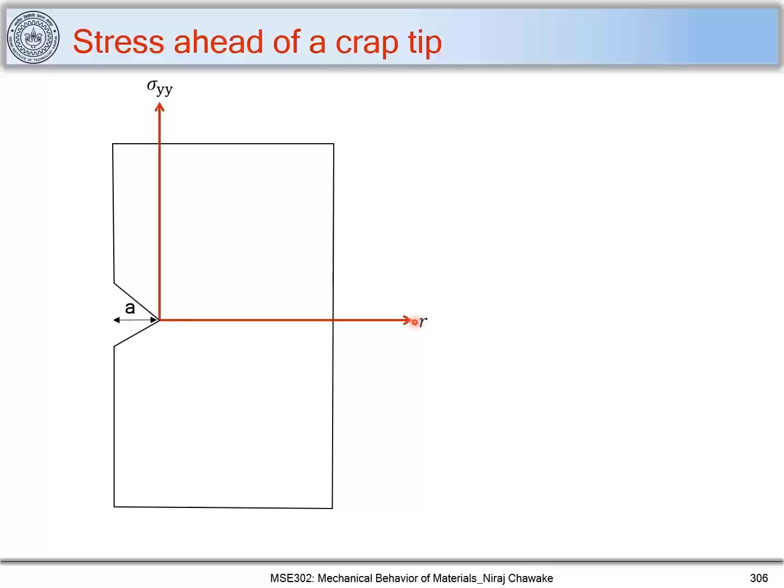In this part, we'll be looking at how cracks which have plastic zones ahead of the crack tip are modeled. For that, let's consider this sample which has a surface crack of length A, and let's mark coordinate axis R here ahead of the crack tip, and sigma yy, that is stress along the yy direction.

Let's say if we don't have a plastic zone ahead of the crack tip, or the material is elastic or a very brittle material, you will see the stress field ahead of the crack tip varying in this fashion, where you reach a very high value of stress just ahead of the crack tip. We have seen this in an earlier part.

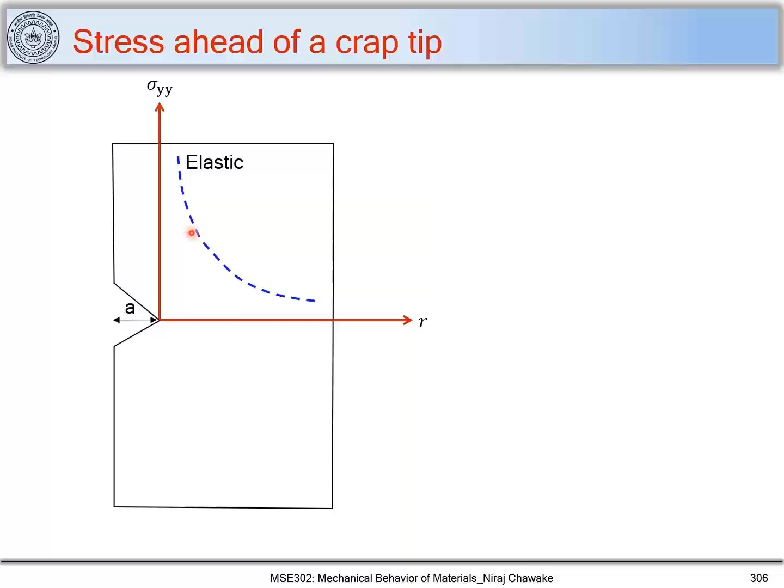Now let's consider we have a plastic zone which has a diameter of Rp ahead of this crack tip. This will happen when the material deforms plastically, or the material is plastic or ductile.

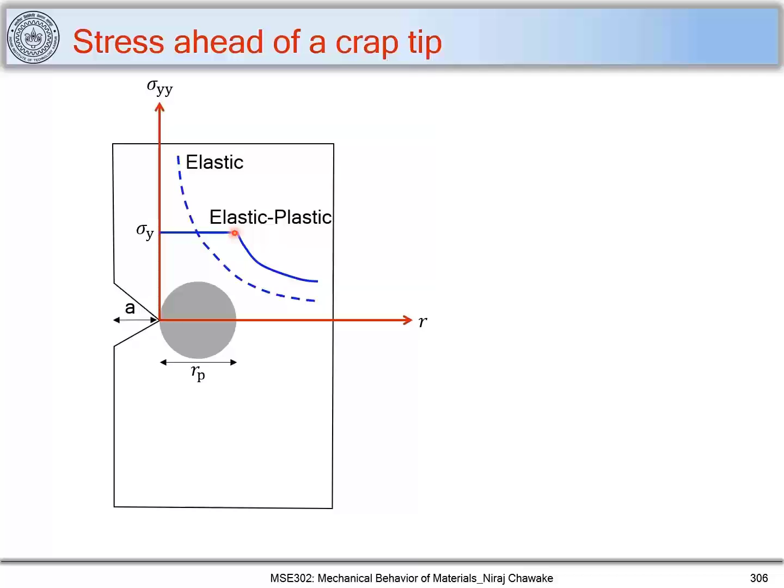So we can see that for this kind of material which shows a plastic zone ahead of the crack tip, the stress variation will be sigma y, where sigma y is nothing but the yield strength of the material. So the stress ahead of the crack tip remains constant, and such materials are called elastic plastic materials. When this plastic zone ends, the stress varies or decreases in this fashion with respect to R.

Irwin has described this kind of elastic plastic material using a model, and he considered this radius to be A effective, where A effective is nothing but this crack length A plus Rp, which is the diameter of this plastic zone. This Rp can be found out using this radius R1, and Rp is almost equivalent to twice of R1.

If you consider this material to be elastic, you have the stress field variation with respect to R in this way, and when you have an elastic plastic material, you have the stress field variation in this way. Where these points intersect, that R is nothing but your R1.

So here R1 is the location where this elastic stress becomes equal to sigma ys, that is the yield strength of the material. That is how you find R1, and from R1 you can find the plastic zone, which is nothing but equal to twice of R1.

Irwin considers that A effective, that is the effective crack length, to be equal to A plus Rp. This is nothing but a fictional crack length. If you consider this theory, this model considers a longer crack length, but it takes care of the stress field. So you can see the stress field will be taken care of if I consider this crack to be of this length, that is A effective, it can take care of the stress field ahead of this plastic zone.

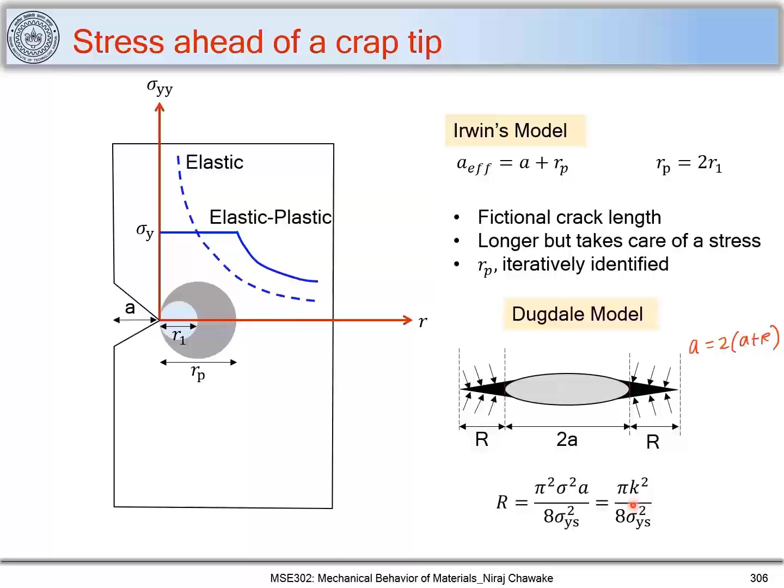What Dugdale considered is that this plastic zone blunts the crack, and it can be considered that there are compressive stresses acting on this region of R, which is the plastic zone. So we have an effective crack length of 2A plus R, and on this R part you have compressive stresses. Based on this assumption, R can be found out to be equal to pi K squared upon 8 sigma ys squared, where sigma ys is the yield strength of the material.

And you can find out the length of this plastic zone using Dugdale's model. I'm not going into the derivation of it; it's given in the Mechanical Metallurgy book by George E. Dieter.

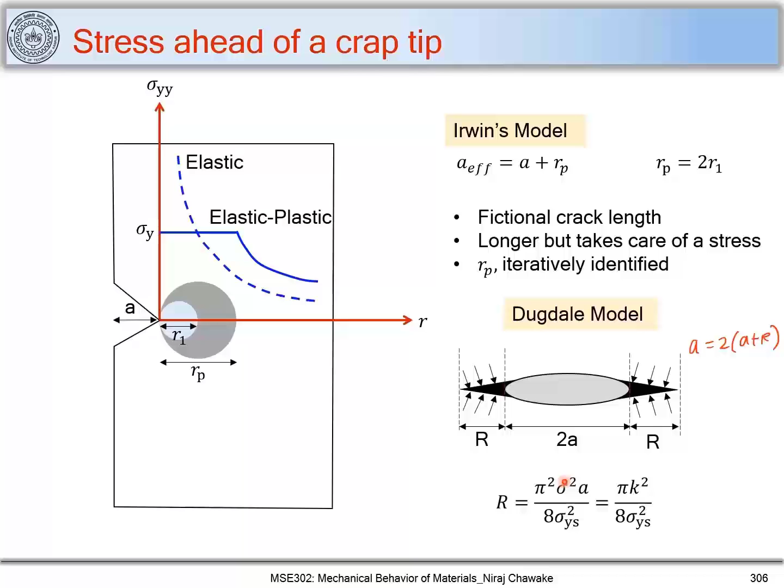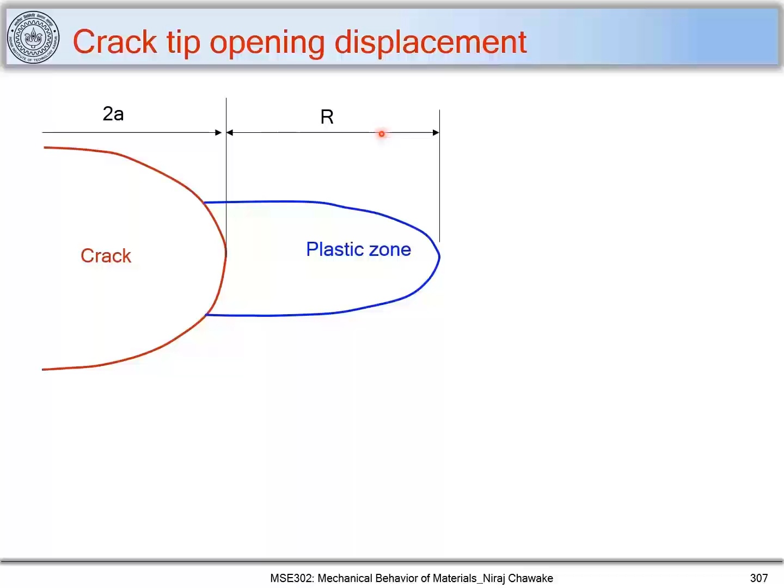Now let me introduce an important term when we talk about elastic plastic materials, that is crack tip opening displacement. So for that, let's consider this as a crack, and let's consider a plastic zone ahead of this crack tip. Let's consider this crack of length 2A and the plastic zone of length R. Let's consider this crack is subjected to mode 1 fracture, and let's mark our coordinate axes, x along this direction and y in the vertical direction.

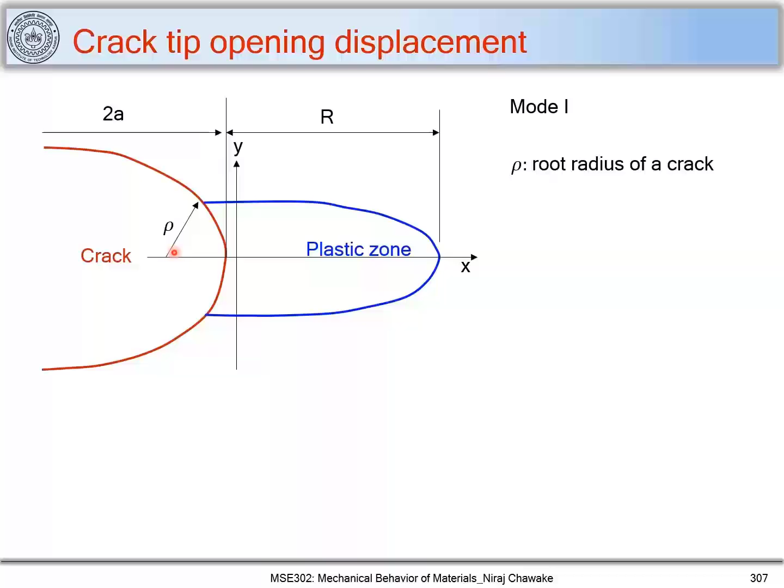Let's consider this to be the root radius of a crack, that is rho, and this distance delta is called crack opening displacement. So when you subject this crack under mode 1 condition, this delta will increase. Let me mark that. So when you put a force in mode 1, you can see that this delta tends to increase, and this is why it is called crack opening displacement, because this crack will open.

Now this delta, small delta, is called crack tip opening displacement. So you have this crack tip, and when I put this crack in mode 1 fracture, you can see that this delta also will increase, and this is called crack tip opening displacement.

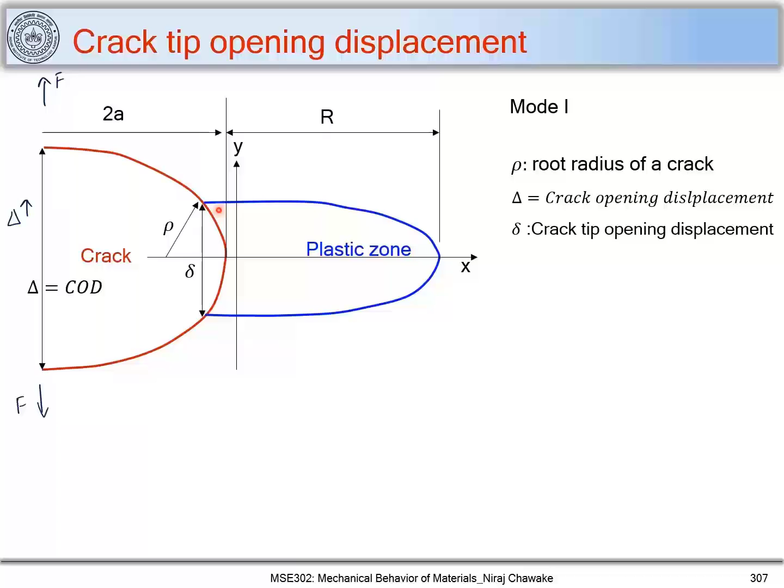Now what you can consider is that this is a plastic zone. So ahead of this crack tip, you can consider that there is a tensile sample or specimen which has dimensions of length L and width W. So you can say that when the force is applied, this tensile sample will experience some kind of plastic strain, because it lies in the plastic zone, and that's why this sample will elongate, and that is how this delta is modeled based on the strain developed in this tensile sample.

So this is an imaginary situation or just a thought experiment, that there are a series of these tensile samples ahead of the crack tip which can represent this plastic zone. Now, when this sample breaks, it passes the strain on to the next sample like this. So here you can consider another sample, and when this sample breaks and causes a fracture in the next sample...

In such a case we call this crack to be unstable. When this sample fractures but doesn't cause any fracture in the second sample, such a case is called stable crack growth. So let me write that down. So you have these samples. When sample 1 causes fracture in sample 2, this is called unstable crack growth. When sample 1 fractures but doesn't cause any fracture in sample 2, this is called stable crack growth.

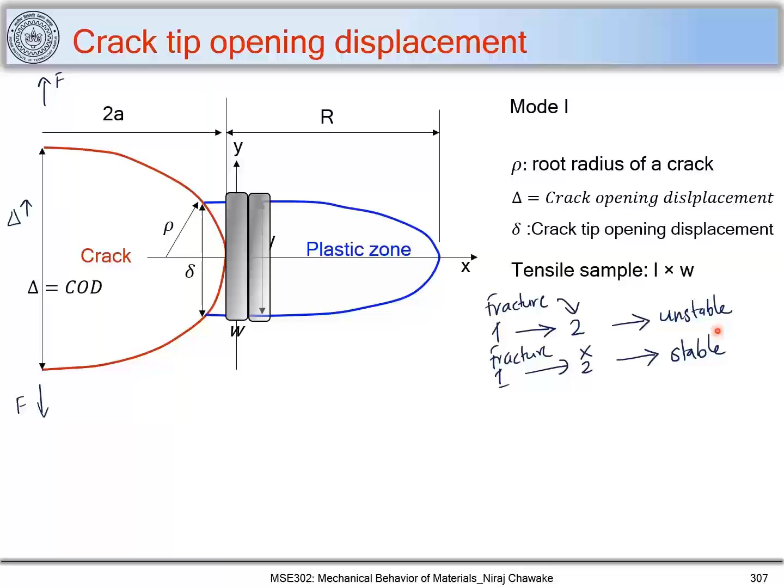So we can find this out using crack tip opening displacement, and an important relation we can find when this crack propagates in a stable way is the strain energy release rate, that G is equal to sigma ys, which is nothing but the yield strength, times delta, which is nothing but the crack tip opening displacement. So you can refer George Dieter for finding out how this relation comes.

You can use Dugdale models, which we have figured out, to find what R can be in terms of sigma ys, and based on these relations you can find out what the strain energy release rate can be. This is an important relation where G is equal to sigma ys, the yield strength of a material, times delta, the crack tip opening displacement.

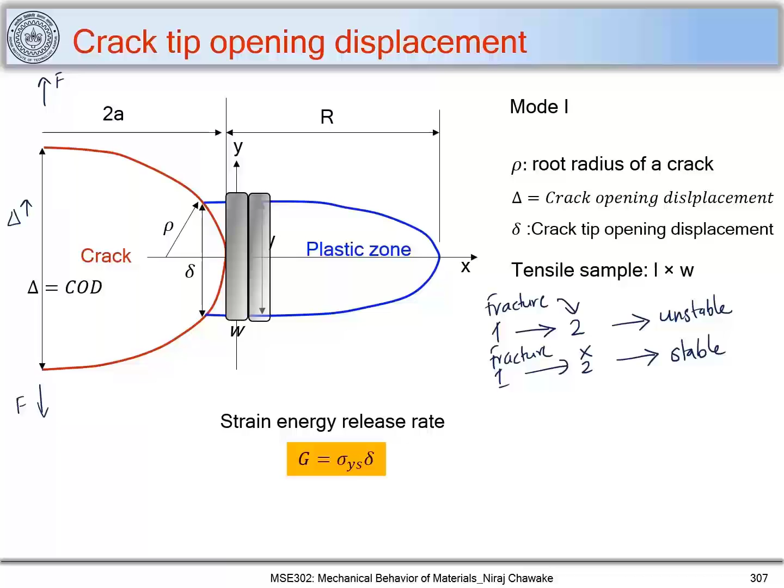Now let me move on and introduce two types of fracture mechanics when we try to understand fracture in materials. One is linear elastic fracture mechanics, another is elastic plastic fracture mechanics. Linear elastic fracture mechanics works very well with brittle materials we have already looked at, and materials which have very high strength, like more than 1400 MPa. For such materials you can comfortably use linear elastic fracture mechanics. However, when the material deforms plastically or materials are ductile, you should use elastic plastic fracture mechanics to understand the fracture behavior of such materials.

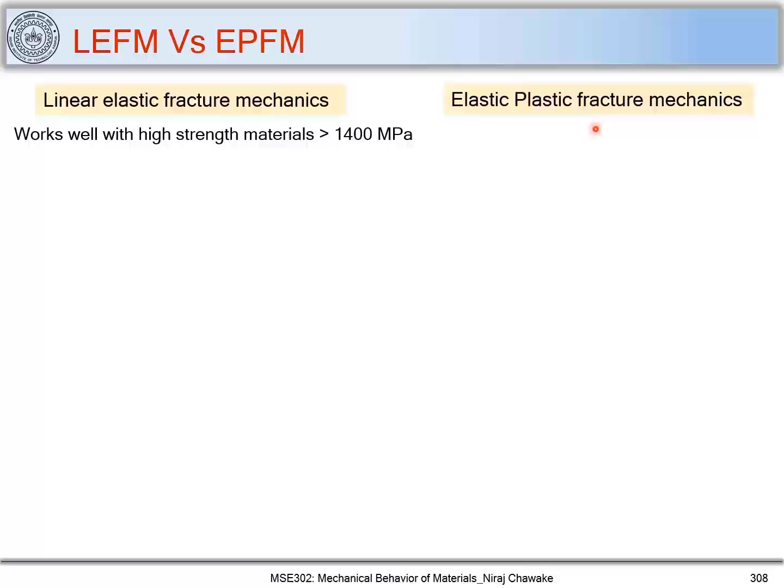Now let me explain to you what LEFM is. So let's consider you have force and displacement of this crack.

Let's say you have a sample of thickness B equal to 1, with an initial crack of length A. In such cases, the crack will displace when you apply or increase a force linearly. That is why it is called linear elastic fracture mechanics, since the displacement has a linear relationship with the force.

Now let's say you have a crack A plus delta A, a small increment in crack length. We have seen that the force to extend such slightly bigger cracks will require a less amount of force. The energy we get here in between, we term it as G into dA. The difference between these two gives you the quantity GdA, where dA is a small increment in the crack, and G is the strain energy release rate.

Now when we look at elastic plastic fracture mechanics, we also plot force versus displacement. But in this case, the variation of force with displacement is not linear. Consider the unit thickness of the sample to be 1, and for a crack length A, the force displacement relation is not linear.

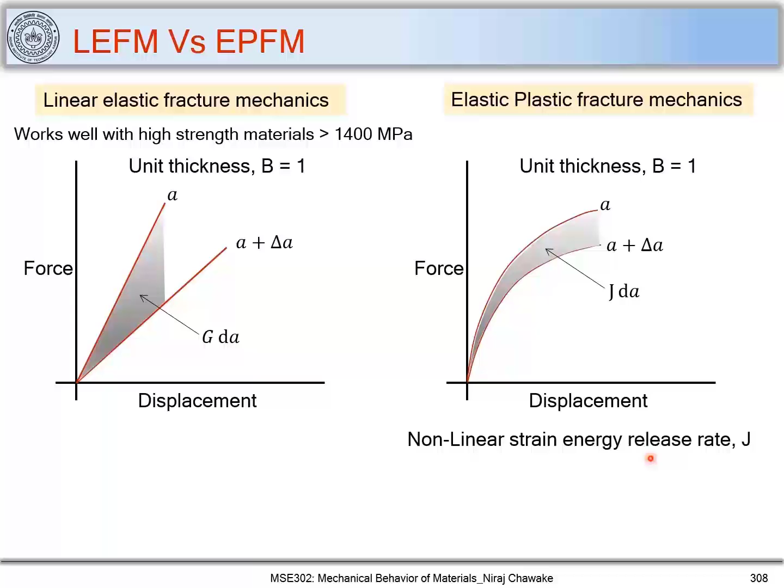So the linear strain energy release rate we denote by G, whereas the non-linear strain energy release rate we denote by J. This J comes from the name James, the first name of James Robert Rice, one of the famous scientists from Harvard University, who proposed how to identify this energy when you have a non-linear variation of force with displacement, that is, elastic plastic fracture mechanics. He contributed the concept of the J integral. So J comes from James Rice, and G comes from the name Griffith.

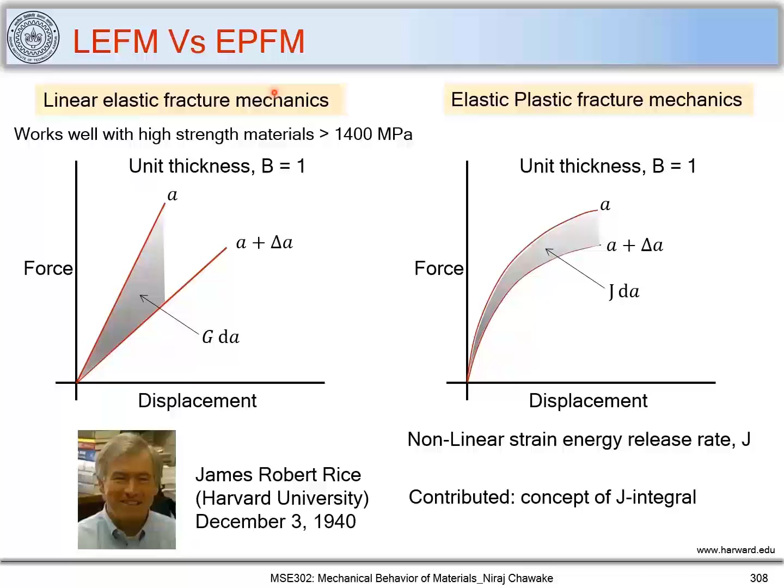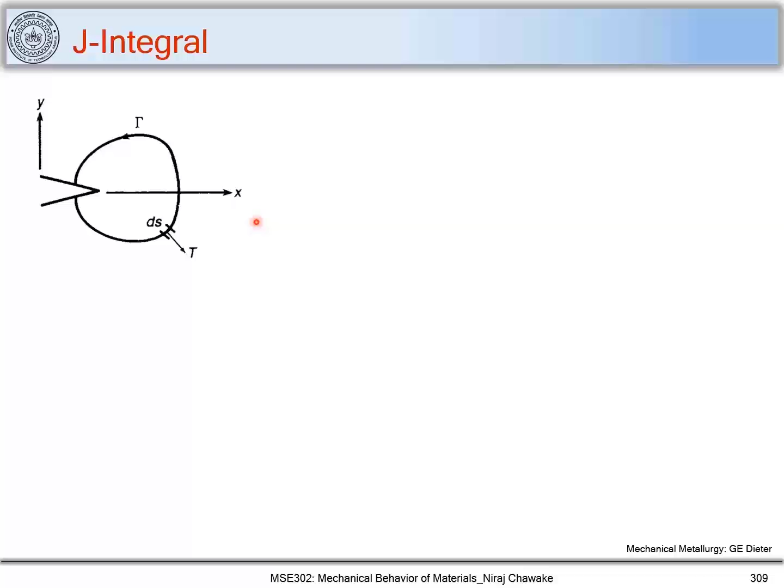With this introduction, let's understand what the J integral is. We have to find out what the non-linear strain energy release is. Let's consider this crack, with this as the X direction and this as the Y direction. These are our coordinates, and let's consider this line given by gamma, capital Gamma.

To find J integral, the non-linear strain energy release rate, we do it by finding a path independent line integral. We consider this as the path, marked in this way, enclosing the crack with this line. That is why this is a line integral to find J, which is the non-linear strain energy release rate.

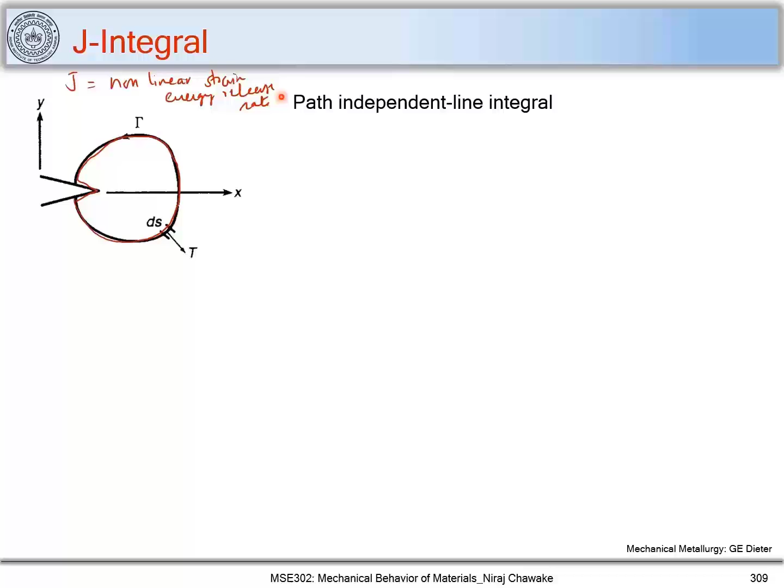Now we'll follow the same methodology used to find G, the linear strain energy release rate. Let's consider this a 2D approach, with thickness equal to 1. We find J to be equal to minus du naught upon dA, where when the crack extends there will be a release in strain energy, which we call the release of potential energy per unit crack extension. This can be found using this line integral over the line segment gamma.

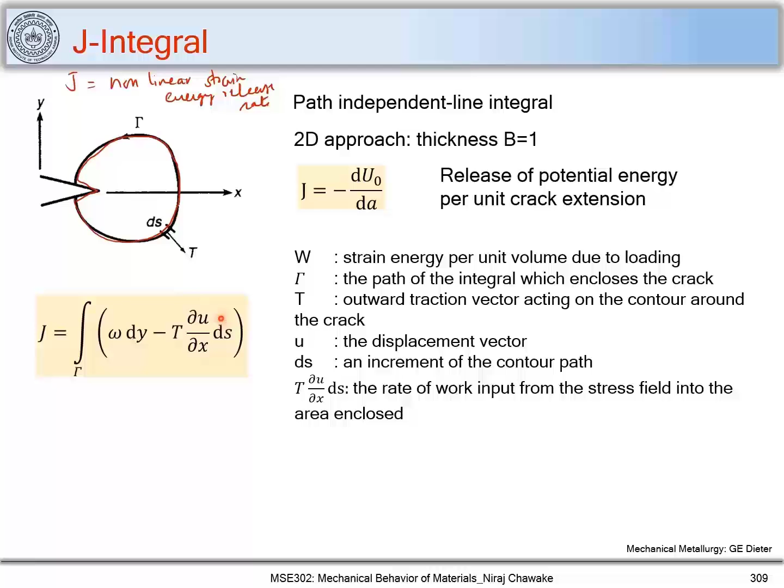When the crack extends, there is a release of strain energy. Also, some work must be done, given by this term. This total value gives us the change or release of potential energy per unit crack extension. This term gives the strain energy per unit volume due to loading. This gamma, the path, must enclose the crack.

So this is the path of the integral which encloses the crack. This T is nothing but a traction vector, that is a force acting on this crack on this path, small path ds, which is nothing but an increment of the contour path. So when we consider this small path and integrate over the whole path gamma, this T del U upon del X into ds gives us the rate of work input from the stress field into the area enclosed.

When this crack extends, there will be a release of strain energy, and there will be work done to form a new surface, or an increase in energy to form new surfaces. This can be amounted by considering the rate of work input from the stress field into the area enclosed. So what is the energy required or work input when the crack extends?

And when I say it has to be path independent, what do I mean by that? So I can consider any path - let me mark that also. So I can consider this as my path; the only criteria is that it should enclose this crack. I can move around like this and still enclose this path. I can consider another path, something like this, with the dimensions of the sample itself. So you can consider this path as well.

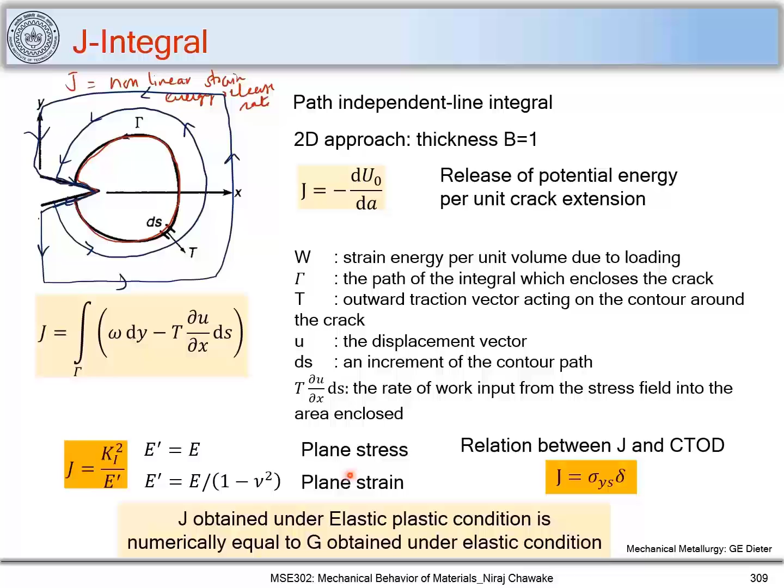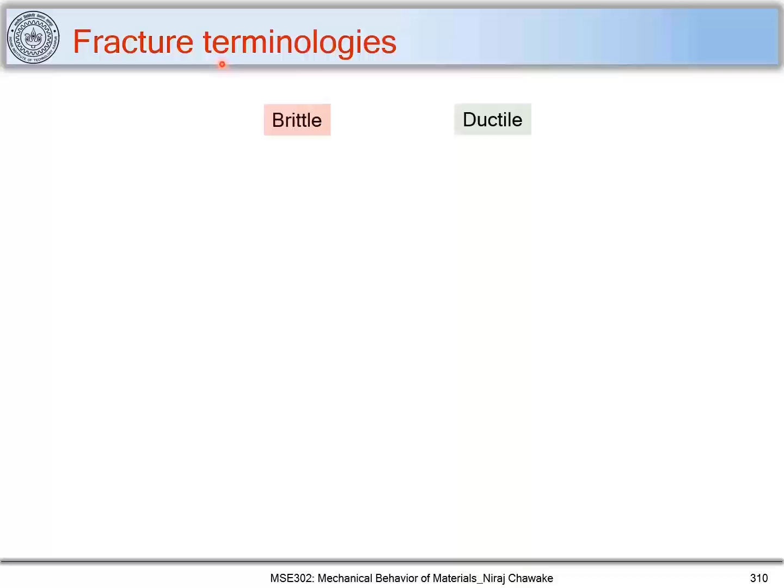And based on this, we can identify what the J value can be at different conditions of stress, that is plane stress and plane strain conditions. Now let me give some terminologies used in the literature, when we consider brittle fracture and ductile fracture. There are three ways based on which fracture terminologies are used. Let's say, crystallographic mode.

So when I talk about crystallographic mode, I call brittle fracture as cleavage fracture. When I talk about cleavage, I mean I'm talking about certain crystallographic directions or planes. And thus, if I call such kind of fracture as cleavage, that means it is a brittle fracture. If I call it shear, it is a ductile fracture.

Now, based on appearance of fracture, you call it granular or bright. So when the material shows, let's say you see a fracture surface and it appears granular or bright, you can consider that the material has failed in a brittle way. And if it is fibrous or dull, you can call it a ductile fracture. Now, based on path, you can call intergranular fracture as brittle fracture, and transgranular fracture or intragranular fracture occurs in ductile materials.

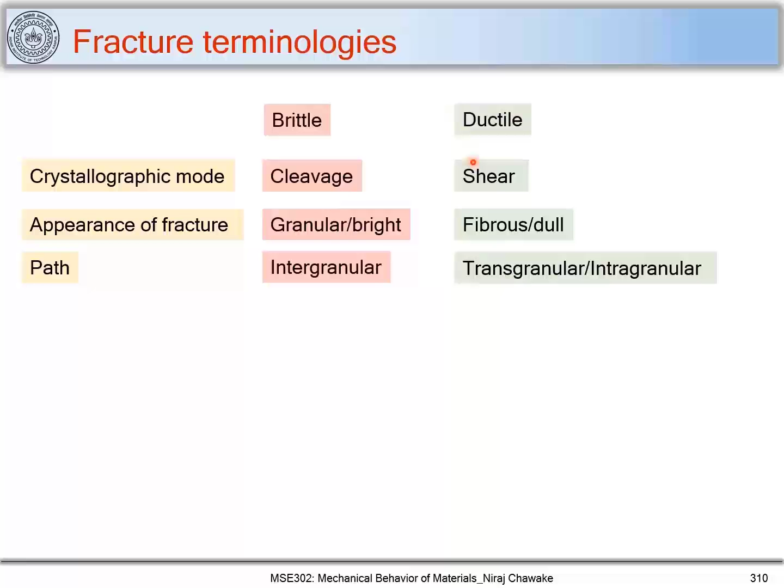So let's understand this: when I say cleavage, I'm talking about a crystallographic mode, and here when I talk about cleavage, it's a brittle fracture.

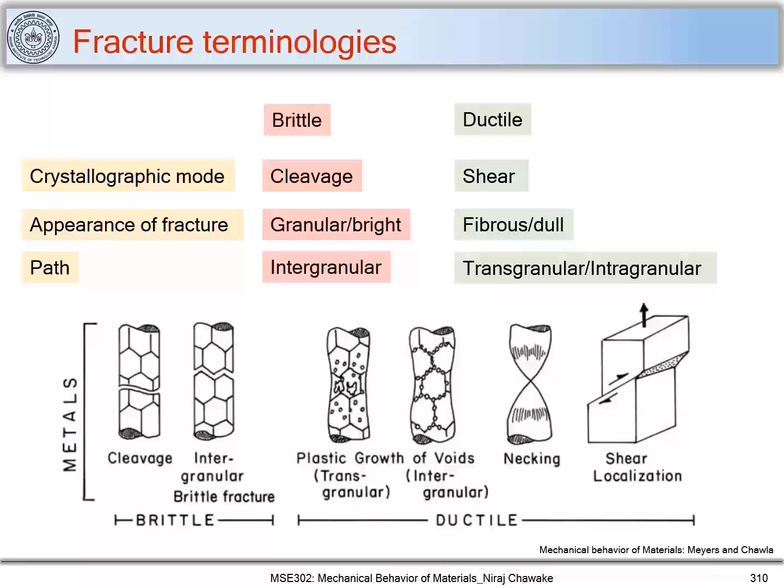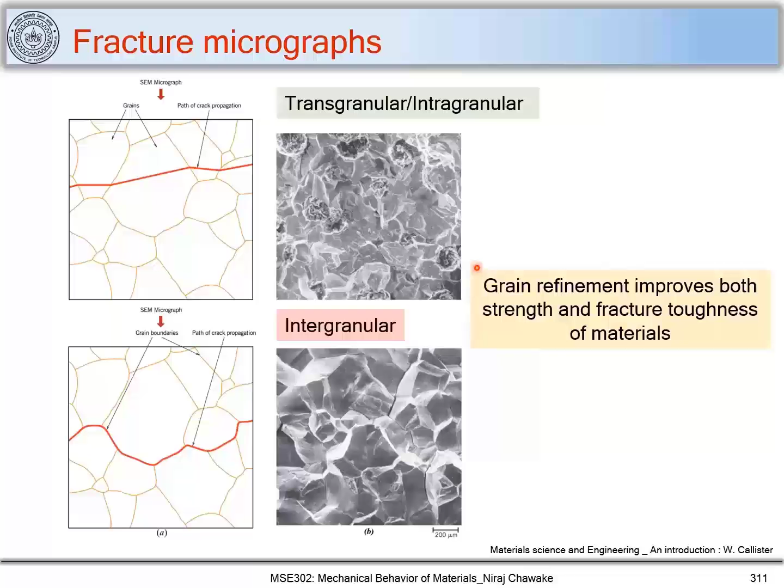In this case, you can say that grain refinement improves both strength and fracture toughness of material. So as you can see, if I have finer grains, the crack will take a longer path along grain boundaries, and thus grain refinement improves fracture toughness. We have also seen that grain refinement improves the strength of material. Now let's go on and try to understand how we can design a material to resist fracture.

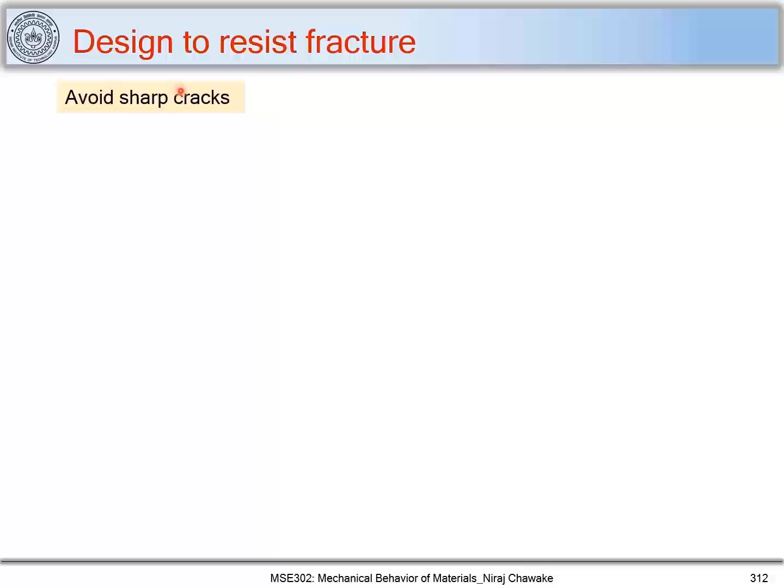So the first thing is to avoid sharp cracks. We have seen that if the cracks are sharp, there will be triaxiality or stress concentration ahead of the crack tips, and thus there will be chances that the material will fail in a brittle or catastrophic way. Another important thing when you try to design composites is to use small fibers over large fibers.

So let's say you have these two conditions where you have small fibers in a matrix and large fibers in this matrix. You can see that if there is a delamination happening, let's mark over here, so the crack will typically have the length D. So the largest crack will be greater than the diameter of this fiber. Let me write that down also. So your crack will be somewhat similar to the diameter of this fiber, and thus if the crack length is higher, the material will fail at lower stresses also.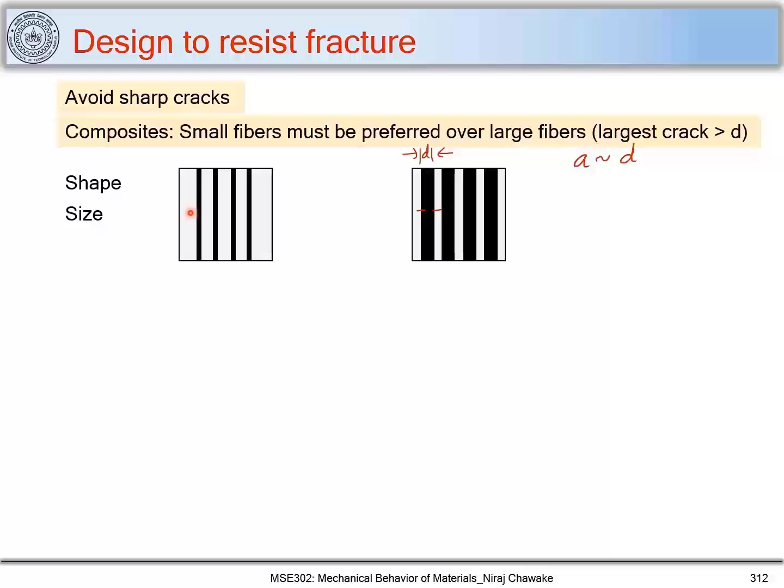That's because the fracture toughness goes down. So when you want to design a material, you should always design with small fibers. This design criteria considers the shape and size of these fibers. For shape, we've talked about going for smaller fibers so that it should not create any stress concentration. So you should not have fibers which have sharp tips. Let me write them down also: fibers, no sharp tips or sharp edges.

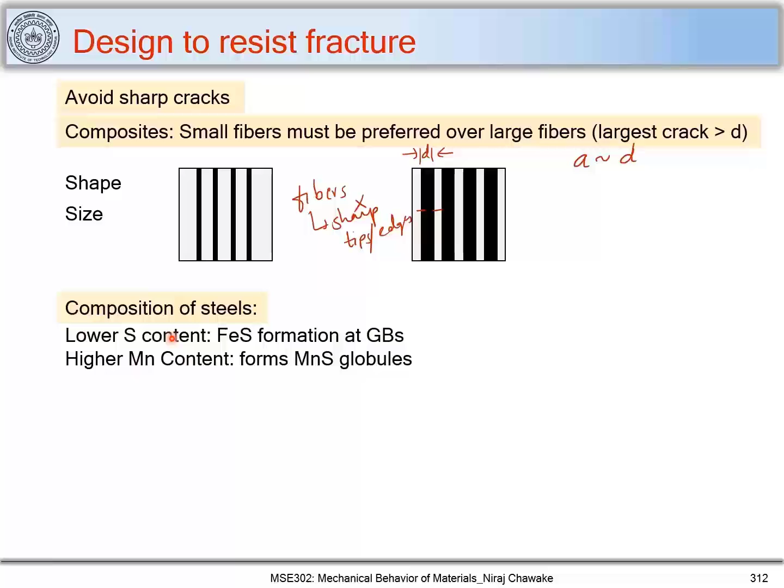Now let's consider a composition of steel. Steel is used widely for many structural applications. So when you design a steel composition, it should always have lower sulfur content. Why? Because it forms iron sulfide at grain boundaries, and it should have higher manganese content because it forms MnS globules.

Let's understand this. When you have higher sulfur content, this forms FeS, which has sharp edges or sharp precipitates that form at these grain boundaries, and thus this FeS makes these grain boundaries susceptible for crack propagation, decreasing the fracture toughness of the material. So any phase at the grain boundaries which is brittle, like this FeS, increases the stress concentration and makes the material susceptible for crack propagation. This FeS acts as a location for crack nucleation and propagation itself. So if you have more sulfur, it leads to more iron sulfide at the grain boundaries.

You might remember the case of Titanic. When the Titanic was made, it supposedly had a large content of sulfur. Because of this sulfur content, there may have been formation of iron sulfide at the grain boundaries. When it hit the iceberg, this material caused crack formation at these boundaries, and it catastrophically failed, leading to a tragic accident.

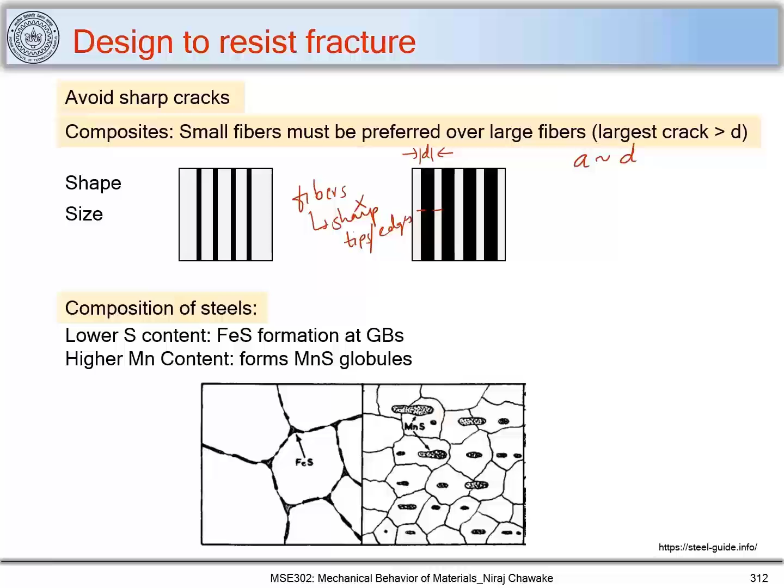Now, how do we deal with such a situation when you have a large amount of sulfur? During steel making, we add a higher amount of manganese. Manganese has more affinity towards sulfur than iron, so it forms globules inside the grains, not at the boundaries. This reduces the susceptibility of the steel to form cracks at the boundaries and their propagation through boundaries, thus avoiding brittle or catastrophic failure.

Another way to increase the fracture resistance of a material is by introducing a compressive stress on the surface. Let's understand this.

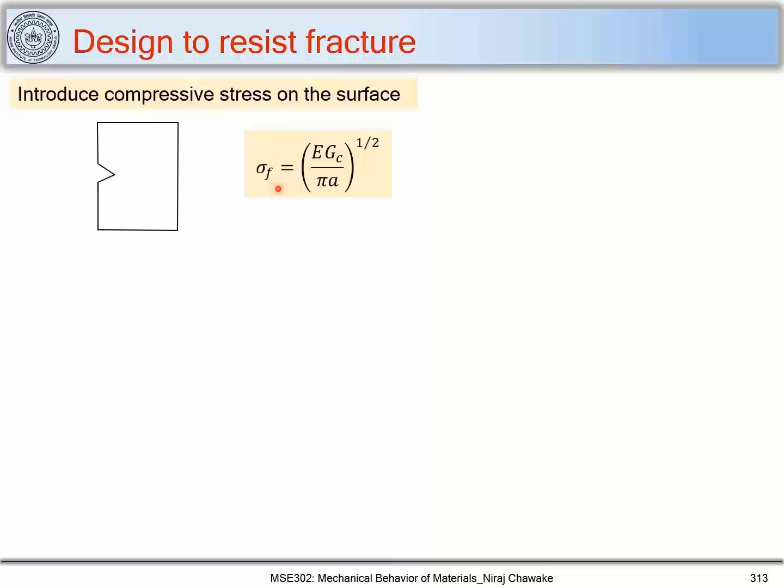We have this crack, and we know that sigma f can be found using this relation, where A is nothing but the crack length. Let's say I consider it as a surface crack. What I do is put a compressive stress on this crack. You can find out sigma f dash, the stress required to fracture, will be this sigma f plus the compressive stress, sigma compressive. These values add up, and that is why you need more stress to fracture such a material which has compressive stresses on its surface.

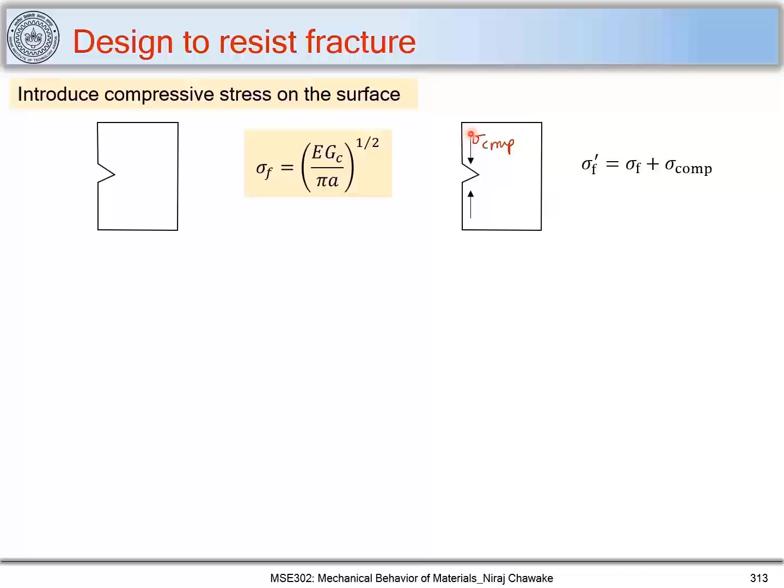So it is an ideal approach that when you want to increase the fracture toughness of a material, always have or introduce compressive stresses on the surface.

Now how is this done in glasses? You can check tempered glasses which we use in our mobiles, also referred to as toughened glass. We get compressive stresses on the surface by some thermal treatment. You can refer to any standard textbook for this: you have a glass, heat it to some temperature, take it out, and blow air on the surface on both sides. The surface layers get cooled faster compared to the interior of the glass, and that creates compressive stresses because of this differential thermal cooling.

That is why this is called tempered glass, obtained by thermal treatment. There is another way to make glass tougher more effectively, called chemically strengthened glass, which we get using ion exchange. You can search using the keywords Gorilla Glass to find out how they make the surface of this glass tougher.

Now in the case of steel, what we do is carburization. We increase the carbon content on the surface layers and do some heat treatment such as quenching, to make the surface stronger or introduce some compressive stresses on the surface of steel.

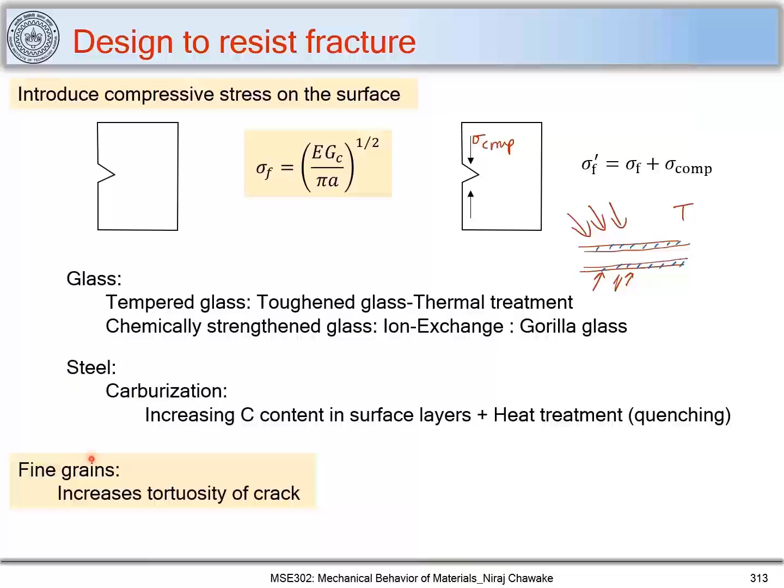Another way to increase fracture toughness is to make the grains finer, which increases the tortuosity of the crack. What do you mean by tortuosity?

Let's say you have this material, and the crack will propagate in this fashion. I call this total length Lm. Now I can project this crack along this direction, and call it the projected length. So when I say it increases tortuosity, tortuosity is defined as Lm, the total length of the crack, divided by the projected length Lp. If the tortuosity is higher, it means the crack takes a longer path, so Lm is greater than Lp. Fine grain does increase this tortuosity, and thus you get an increase in fracture toughness.

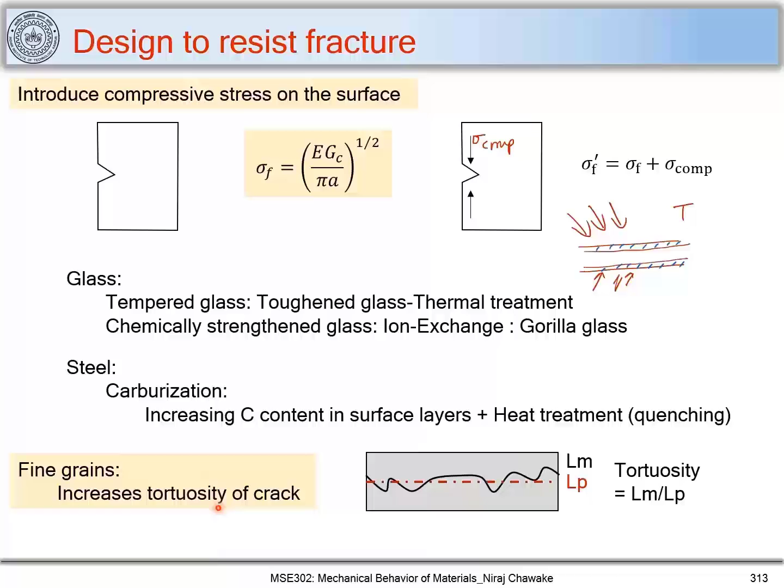With this, I'm stopping the topic of fracture. Thank you.